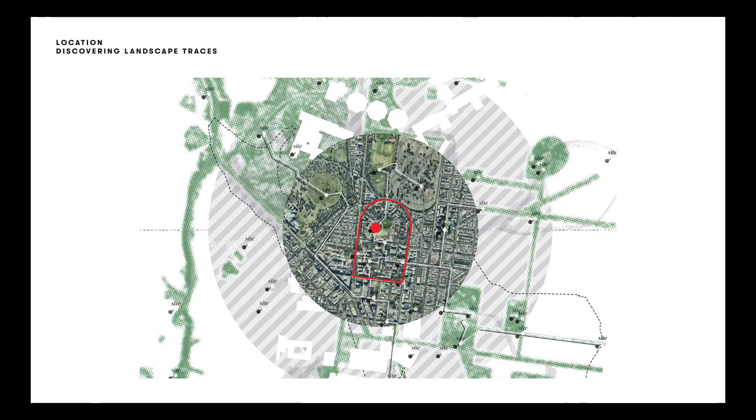Project 100 is just a 2 or 3 minute walk from where we stand in the northeast corner of Trinity College, which sits, as you're probably aware, in the sweep of the Melbourne University residential colleges.

At 5 levels, the building is one of the tallest on campus, but with careful manipulation of ground levels and siting of the buildings with assessment of key views, we maintained sensitive heritage skyline views from within Trinity but also beyond to adjoining Ormond College.

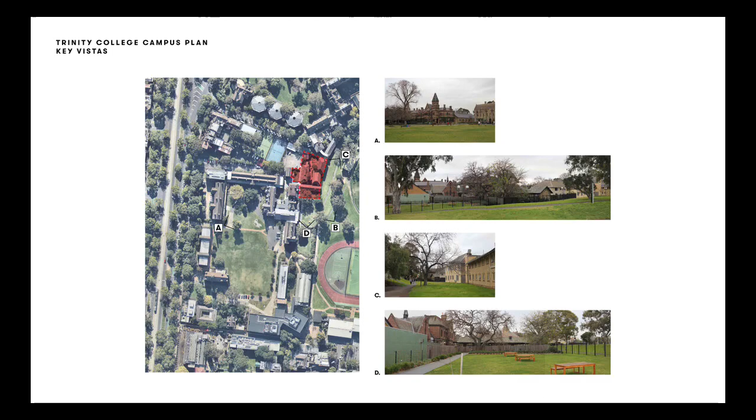2 linear accommodation wings, the outline of the new building shown in red, hinge around the corner of the site and frame a contemporary courtyard space which draws that connection back to the Oxbridge model of the campus.

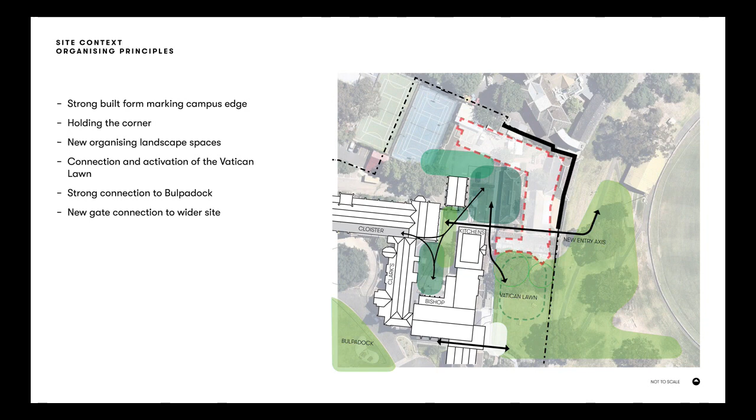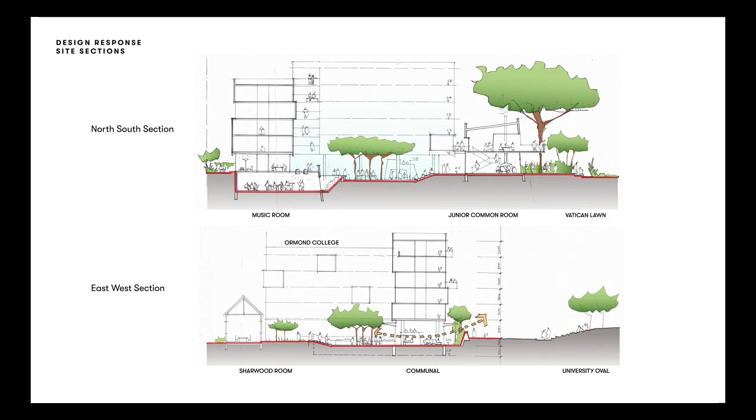Legible pathways connect a sequence of open spaces and provide access to the adjacent sports fields and the remnant River Red Gums. However, at the ground plane, our strategies departed from precedent, where we did away from the quadrangle colonnades and walled enclosures, eliminated in favour of a more open and complex relationship with the landscape. This aerial view shows how the building relates to its neighbouring heritage buildings and open spaces.

The very elaborate roof lines afford rich views from within the upper residential levels. We collaborated very closely with Mark Jacques from Openwork, with landscape becoming a key part of organising the new works.

Importantly, the grade changes created rooms or spatial separations and the ability to have occupied edges. We had a very strong inside-out approach, particularly between the larger communal spaces, such as the junior common room, which sits at the south there, and was conceived more as a separate garden pavilion enveloped in the canopy of a mature oak tree.

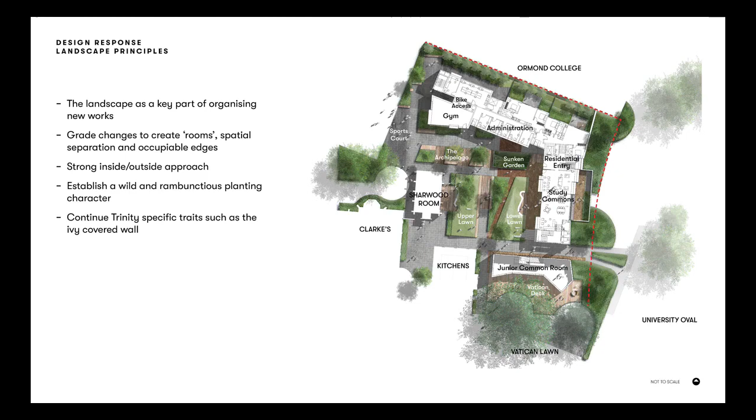So the buildings, with their own cultural significance, are actually demolished to make way for the new works. So we felt it was important to salvage some of these building materials for reuse in the landscape and the new works, to provide a link between the old and the new.

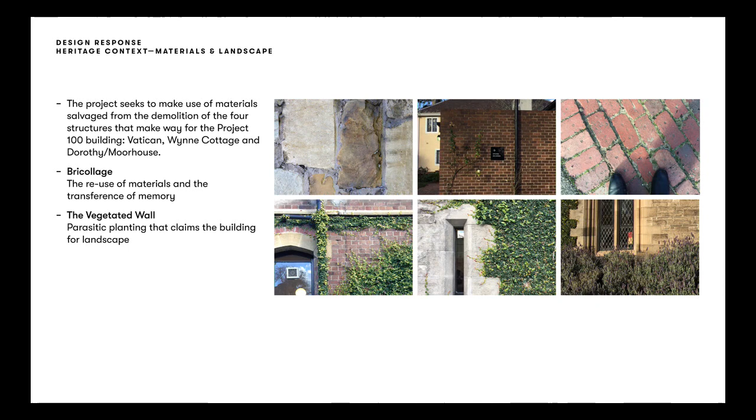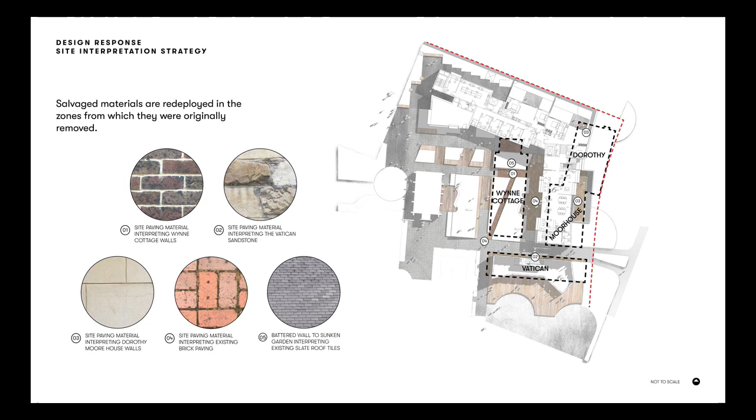We also looked at the landscape for the new feature courtyard walls as a reinterpretation of the parasitic planting that's characteristic around the campus. These materials were generally deployed in the zones from which they were originally removed. They include sandstone, brickwork and slate tiles, which reappear in feature paving and seating, in battered gabion walls, courtyard walls and garden walls.

Project 100 embraces the civic dimensions of architecture, its role in shaping the public realm and adding to the existing network of campus spaces. The building facades are intended to provide a calm and respectful backdrop to the life of the college, and like the landscape, capture and reflect traces of their heritage.

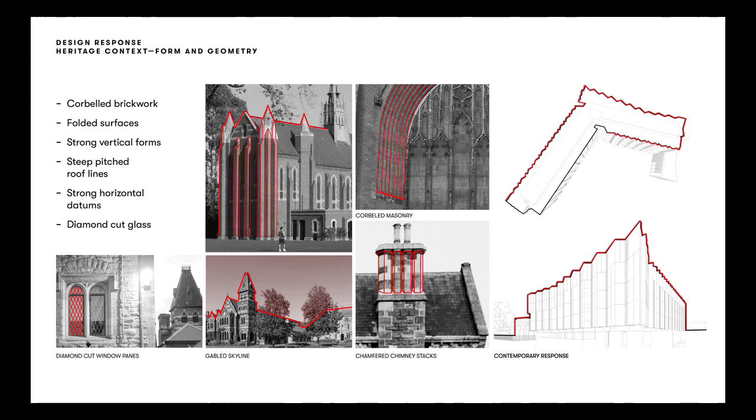The neo-Gothic and arts and crafts era campus buildings provide strong formal cues that inform our design: strong vertical buttressing, brick corbelling and steeply pitched roofs and spires. Gothic arched openings and diamond cut glass add distinctive angular geometries.

The materiality of the campus is also a key reference point. Traditional split bricks, stonework and fine steel framed windows dominate the palette.

The three different conditions of our facades - solid, glazed, operable - are arranged in vertically organised modular panels of locally made whole bricks, frameless glass and aluminium louvred screens. Great care was taken to combine these three finishes into a flush, subtly pleated surface.

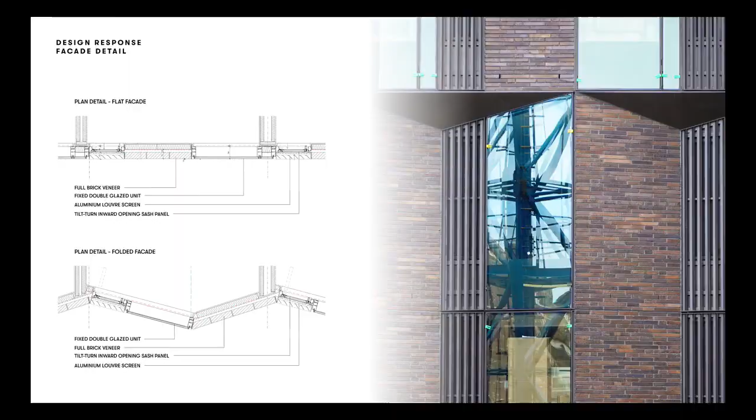As a backdrop to the new courtyard, the calm modular facades read as textured surfaces, subtly disrupted by horizontal datums that rise and fall with the landscape, and glazed breakouts corresponding to community or communal spaces.

The folded facades may be read both as a formal reference to context and an expression of the internal amenity offered by the projecting window seats of individual rooms.

Completing the southern boundary of the new courtyard, the junior common room matches the old kitchens building in scale and alignment. But the glassy pavilion replaces the adjacent ivy-covered brick wall with fine diagonal planting guides intended to create a green screen, mediating views to and from the common room.

The eastern facade defines a new interactive edge to the University Oval in a boldly vertical style.

So it was important for us to work out how to break down that 100 student cohort more into comfortable family cohorts. So there's 25 rooms per level. Each has breakout spaces and floor lounges as well as a tutor room for strong pastoral support.

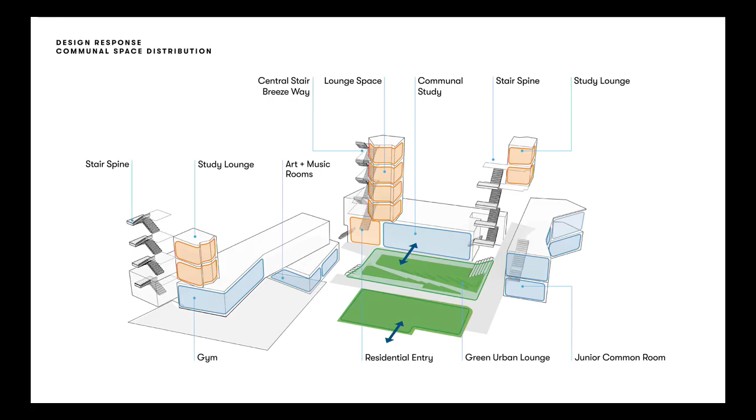And these lounges were deliberately located near vertical circulation because the students told us that there needed to be good visibility and that they get used when they're on their natural journey through the building.

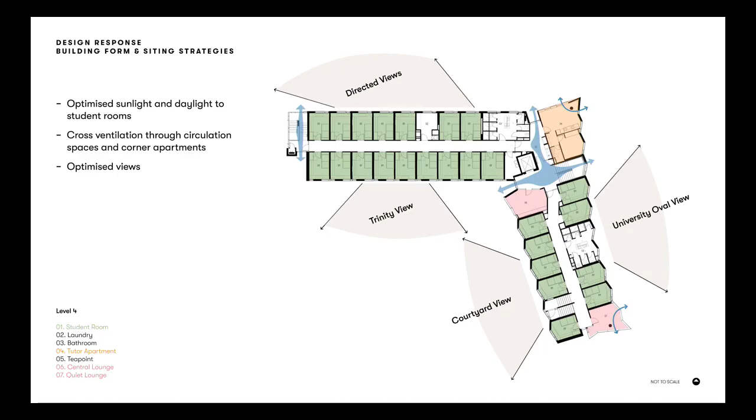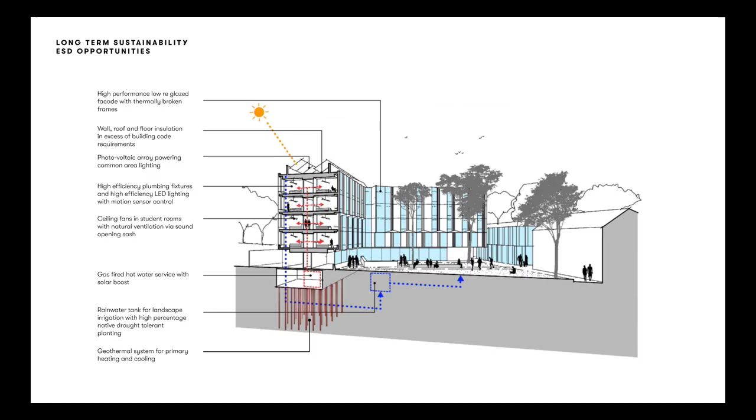The ESD strategy was very important. We worked with Stantec to develop a framework focusing on thermal comfort. It featured a geothermal system which had 30 or 75 metre deep bores which provide the heating and cooling for the building.

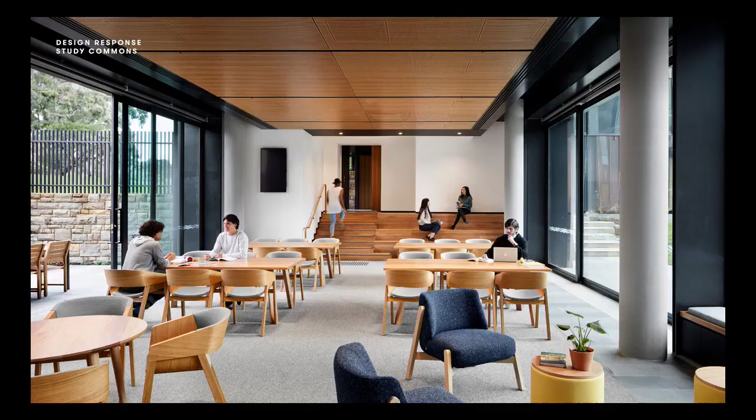The residential scaling of the lobby features the central stair and the louvered breezeway, and this connects directly into the study commons. So the higher ceiling here is accommodated through that lowered ground plane. The structural columns are minimised and internalised, and there's extensive glazing on both sides of the space so that the ground plane is allowed to flow through and under the building.

So in closing, our feeling was that Project 100 really reinforced the college's vision to create an enriching and supportive environment, which is really to enable their young adults to create meaningful connections and to go out and make positive change in the world.